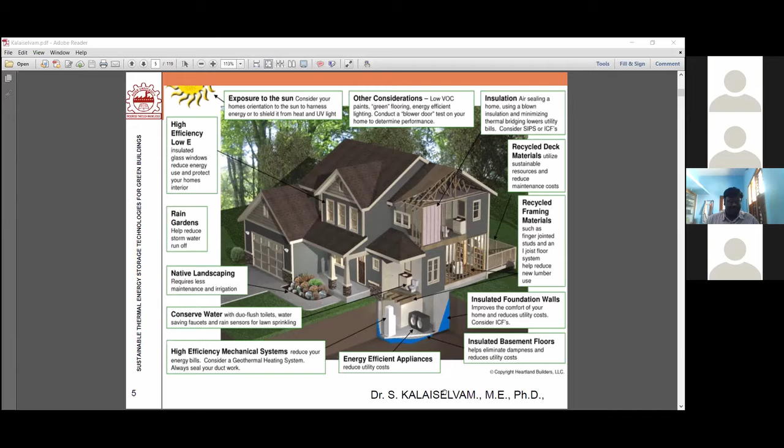So why is the building green? Let me discuss the impact of buildings on resources.

40% of the primary energy used is by the buildings. Out of the total electric consumption, 72% of the electricity was consumed by the buildings.

And these days, even the guest speaker narrated the importance of global warming and greenhouse gas emissions. Normally, we might have thought that industry is the culprit for CO2 emission. It's not really the case.

Our building, the building materials, or the materials used for the building and for the manufacturing of the material, it's all to be taken into account. Out of the total CO2 emission, our building itself contributes 39%.

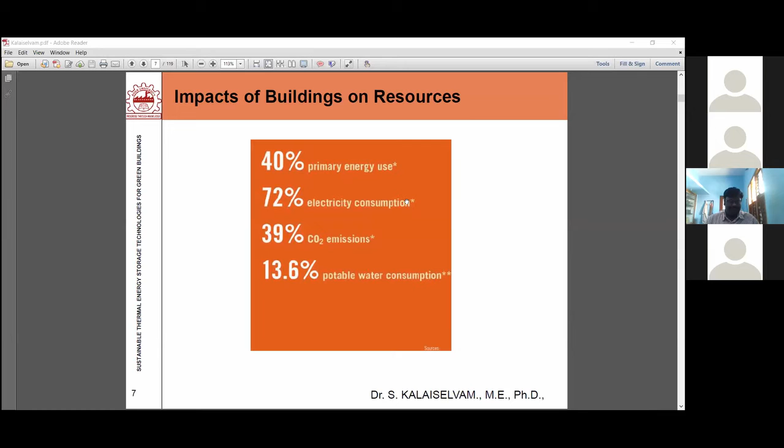And this is very obvious, the water consumption. You all know that 13.6% of total consumption was by the buildings. So this is a huge impact on energy by the building and building materials.

If you use the green building concept in the forthcoming construction of buildings, it has reduced energy usage by 24 to 50%, CO2 emission from 33 to 39%, water usage reduced by 40%, and solid waste reduced by 70%.

So this is the real benefit for the usage of green buildings.

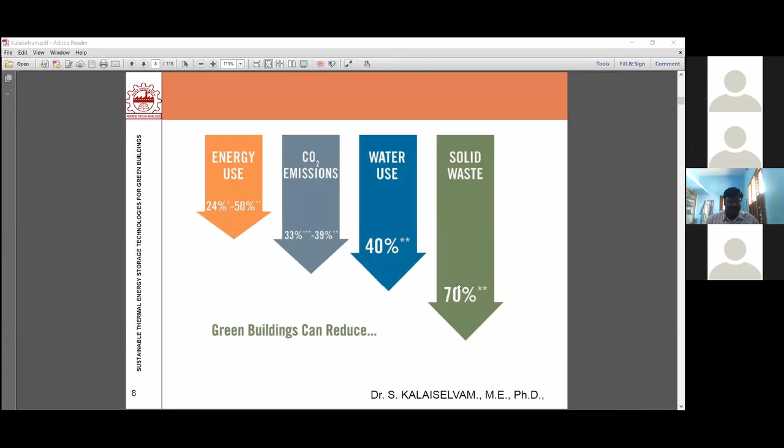As you all know, people spend 90% of their time indoors. And the indoor pollutant level may be 2 to 5 times greater than the outdoor. The outdoor CO2 concentration, or what we normally call the indoor pollutant, is CO2.

If you measure the outdoor CO2 concentration, it is around 352 ppm, and it varies from 350 to 450 ppm. But the permissible level indoors is 1000 to 1200 ppm. That is the permitted threshold limit value for any indoor environment.

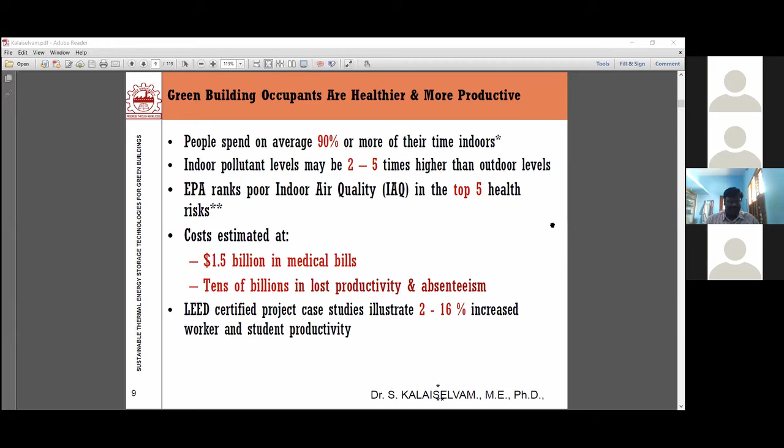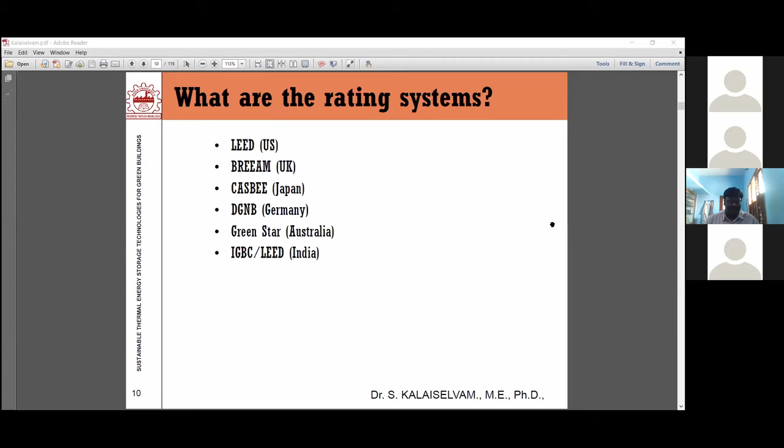As far as ratings are concerned, these are all the rating systems adopted worldwide: LEED, BREEAM, CASBEE by Japan, DGNB, Green Star. In India, we are following IGBC and LEED, which is very similar to the US rating.

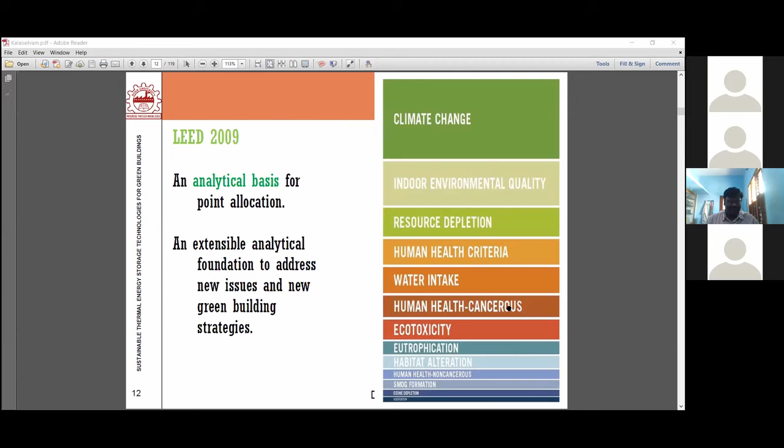As far as LEED 2009 is concerned, this is the weightage given: climate change has higher weightage, followed by indoor environmental quality, resource depletion, human health criteria, and water intake. This is the weightage given in LEED 2009.

This is the LEED certification scorecard. For indoor environmental quality, 17% is given. Sustainable sites, 21%. Water efficiency, 11%. Energy and atmosphere, 37%. Material resources comes to 14%. This is the scorecard breakdown for the LEED certification.

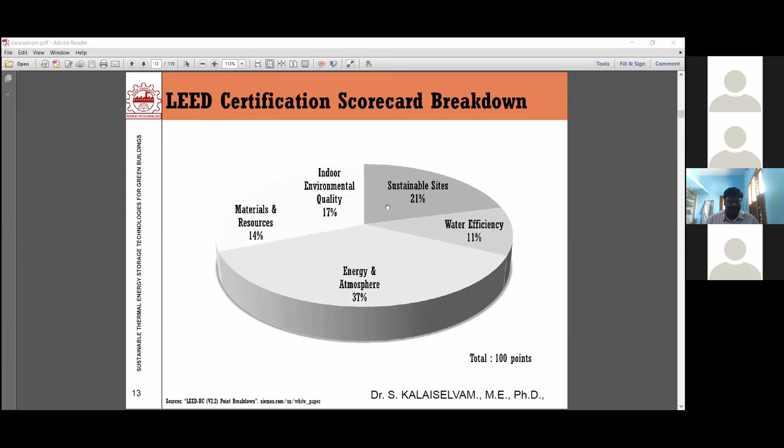To obtain a LEED certification as an engineer, we have to give importance to these particular areas.

As far as the certifications are concerned, yes, Pawan Kumar, any questions? Pawan Kumar?

Yes, please, you can post your question. Okay.

As far as the certifications are concerned, if you score 40 to 49, only a certification will be given. 50 to 59 points, silver rating will be given. For gold rating, you are supposed to score 60 to 79. For the platinum rating, they have to score 80 to 100 points.

As far as indoor environmental qualities are concerned, we have to use low emitting material. You have to emphasize the importance of ventilation, thermal comfort, daylighting, and the overall views.

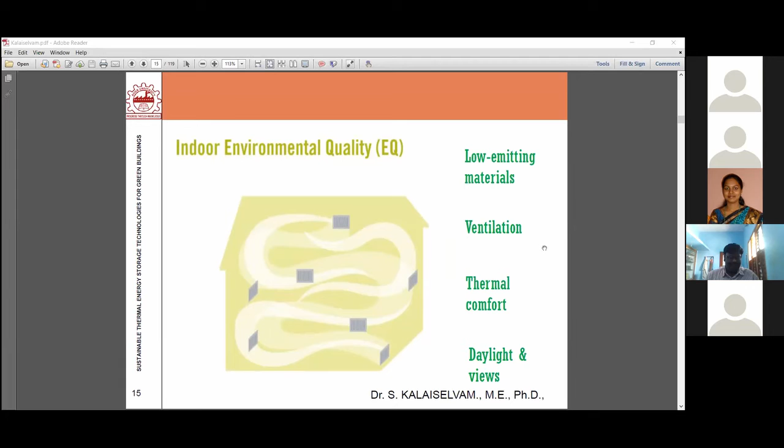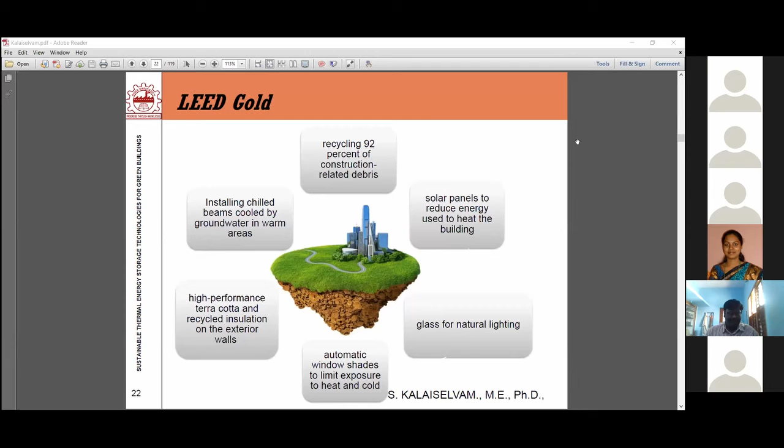And you have to use high performance insulating material for the exterior wall, and automated window shades to limit the exposure of heat or cold that infiltrates into the building. As I stated earlier, you have to use glass for natural lighting to reduce the usage of electrical lights during daytime, and solar panels to harvest energy to obtain the LEED gold.

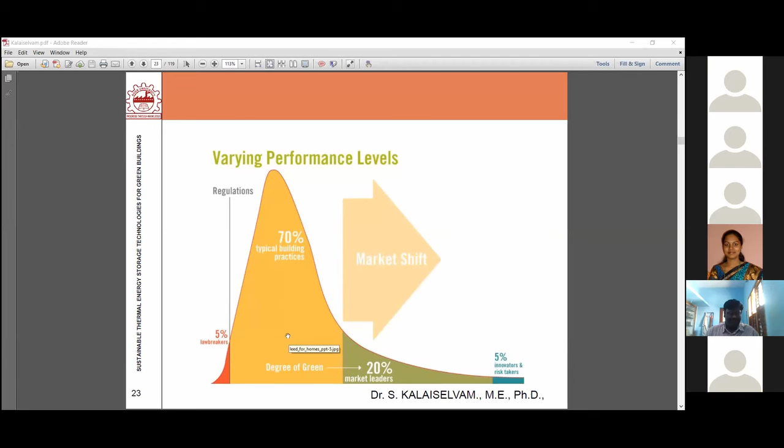This is the varying performance level. Most of the typical buildings coming under this are 70% of conventional buildings. Mostly you all know there are 5% lawbreakers; they will not come into this area. And the market is shifting towards green building. Already 20% of the people are the market leaders. So this 70% is trying to move towards the green building concepts.

So these are business perspectives for the benefit of green buildings. Whenever there are business perspectives or business benefits, then only the industry will move towards the green building concepts, or the residents themselves get ready for moving towards green buildings.

If you implement green building concepts into a building, the operating cost of that particular building reduces by 8 to 9%, and your building valuation increases by 7.5%.

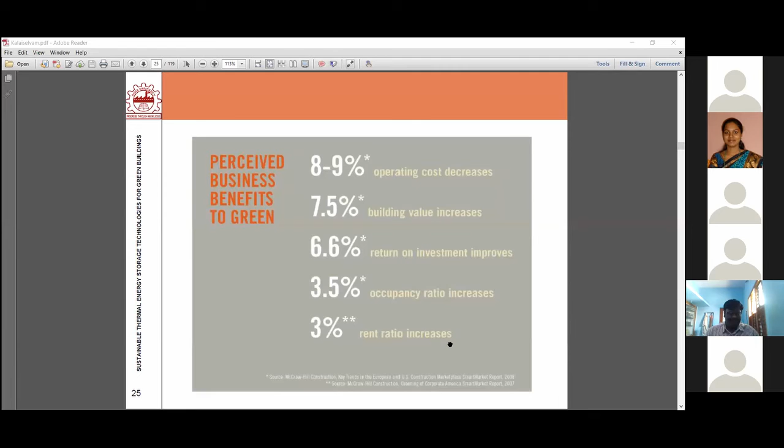And whenever there is an investment, we are looking for returns. As far as green building is concerned, the returns improve by 6.6%. The occupancy ratio increases by 3.5%, and the rent increases by 3%. So these are all the business perspectives for implementation of green buildings.

This is the benefit for builders, and this is the consumer benefit. Green buildings will have benefits for both builders as well as consumers. For builders, the cost is reduced, revenue increased, and high profits. For consumers, there's healthier indoor environment, more comfort, more durability, 30 to 60% more energy efficiency, and more environmental responsibility. So these are all the benefits for both builders and consumers.

So the market paradigm is moving towards the green building concepts.

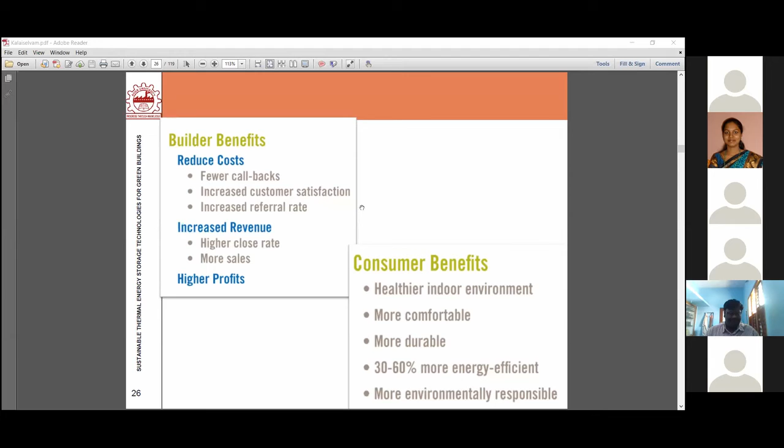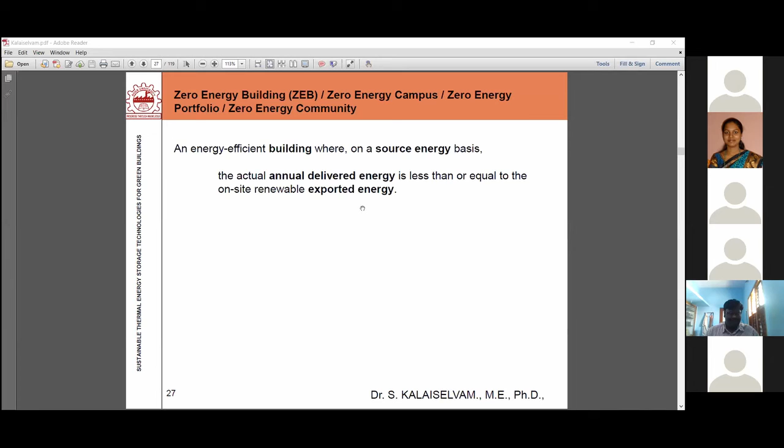So now we move on and narrow down to zero energy buildings, in the sense that you are not supposed to get even a single unit of energy from outside. You have to use whatever energy is available within yourself, and you are not supposed to let out even any waste out of the building.

So here, the delivered energy and exported energy must balance. You are not supposed to use any outside energy. If you use outside energy, an equal amount of energy has to be given back to the grid by using photovoltaics.

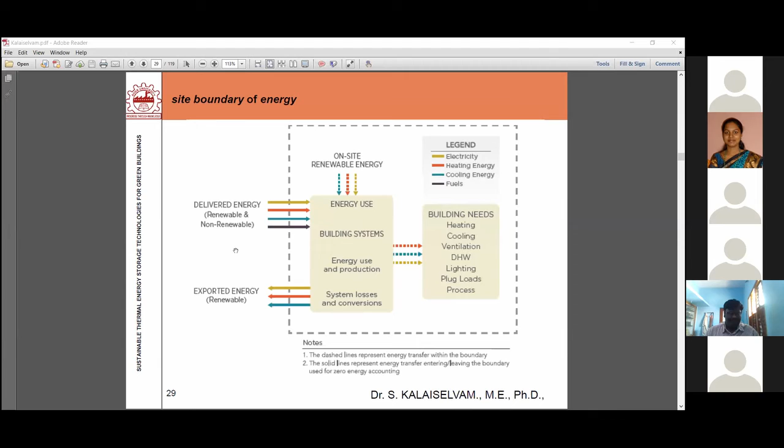To obtain this green building concept, we, as mechanical engineers, are using nanotechnology.

Even the Vice Chancellor of this university emphasizes the importance of nanotechnology, and the previous chief guest also spoke of the importance of nanotechnology.

Why is this so important? In the sense that it increases the surface area, the interface, and the size of it. Because of that, nanotechnology plays a vital role.

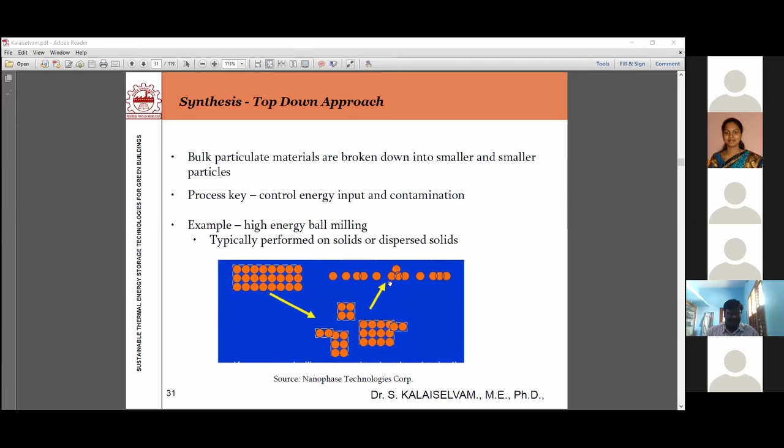And this is the bottom-up approach of synthesis of nanomaterial. A single atom has to be built, and depending upon the size and shape, it has to be constructed.

A typical example: if you place a coin one over another, that forms a cylinder. Similarly, the atoms have to be constructed in such a way that whatever shape and size you want, you can build it.

Mostly, we nano people use the bottom-up approach for the synthesis of nanomaterials.

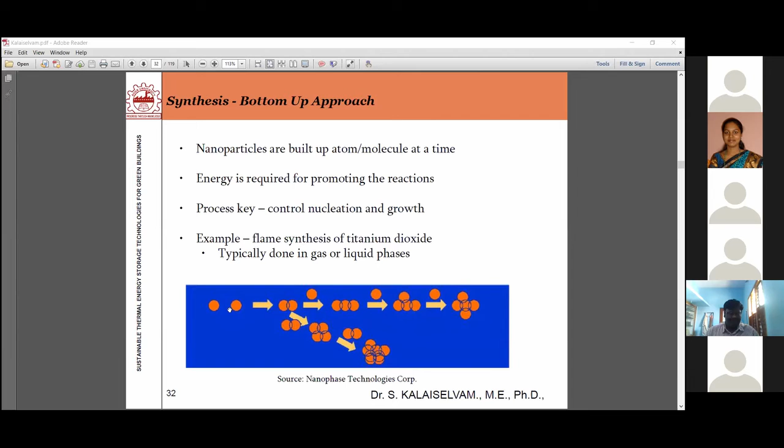These are some of the nanomaterials: nanoparticles, nanorods, nanosheets, and this is a 3D nanomaterial.

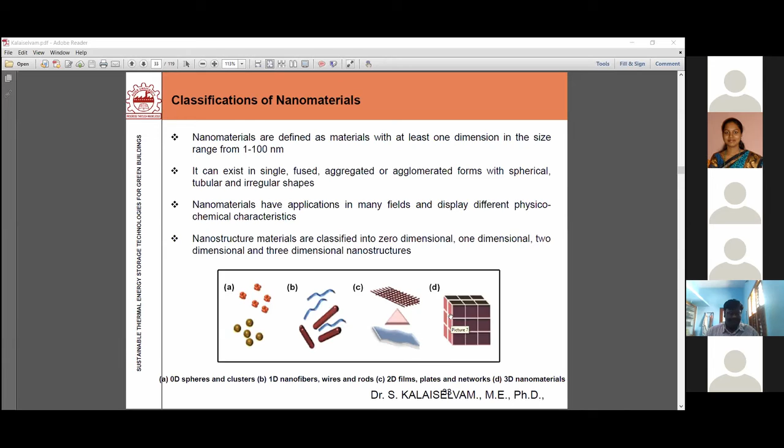This has already been discussed, so for any presentation I will put the slides if I go for a nano level presentation. Why is this so important? Take a typical example of carbon nanotubes.

Carbon is a bulk material. As a bulk material, it's a good insulator. When we make it as a nano form, that is carbon nanotubes, the conductivity of that particular carbon nanotube is better than copper.

Whenever I say transistor material, you immediately say silicon is a good transistor material. But this carbon nanotube is a better transistor material compared to silicon.

For heat conductivity, we immediately think of diamond, but carbon nanotubes conduct twice the heat compared to diamond. For field emission, they are 500 times more efficient than molybdenum, and carbon nanotubes are also stable up to 1500 degrees centigrade.

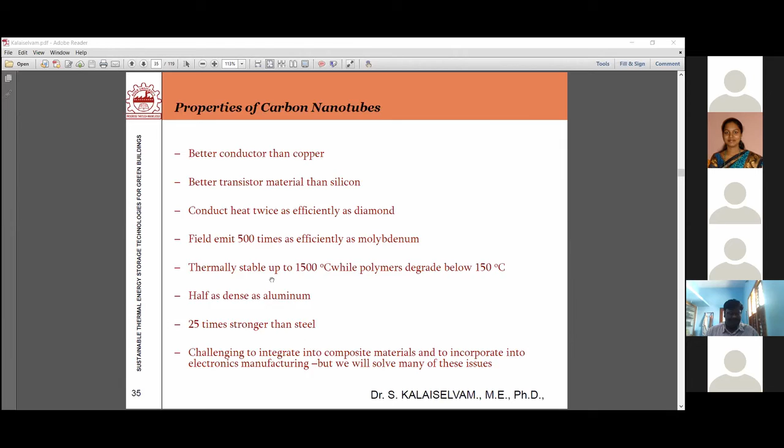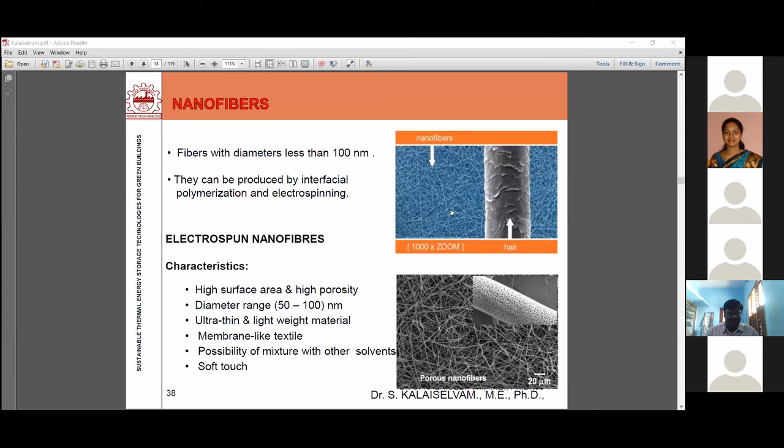And again, this is carbon nanofibers. The properties are similar to carbon nanotubes, but the synthesis of carbon nanofibers is a very simple process. These are some of the carbon nanofibers.

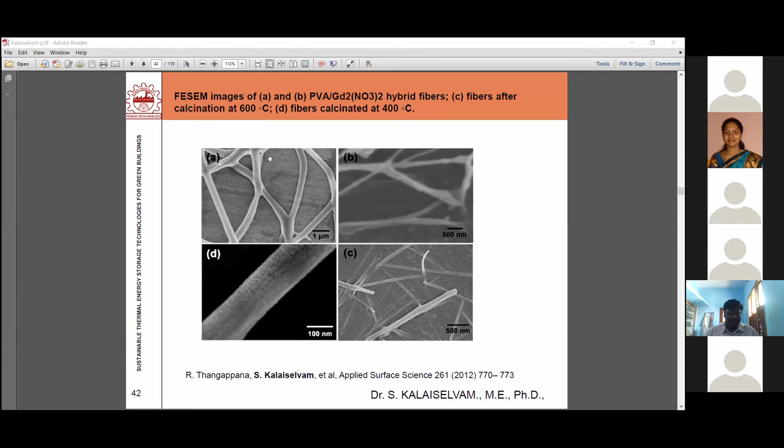And again, this is the nanofiber that was synthesized in our laboratory for the application of capacitor or supercapacitor applications.

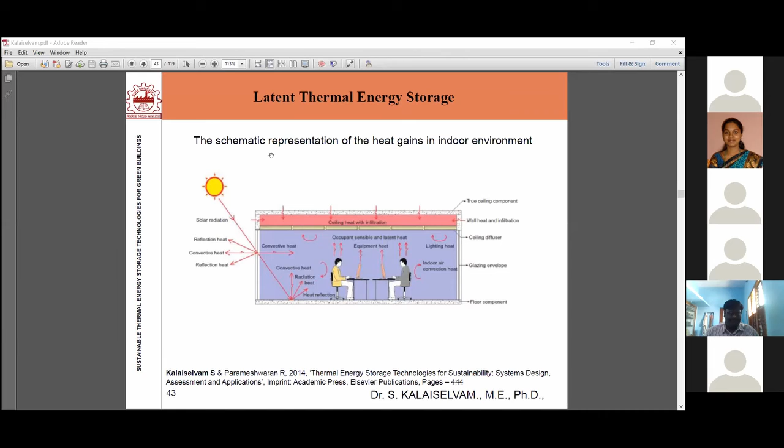Now I will move on to thermal energy storage systems. Normally, thermal energy storage systems are widely used to offset load conditions, storing energy as either sensible heat or latent heat.

As far as sensible heat is concerned, it may be difficult, as the energy storage density may be very low for sensible heat storage. The storage density for latent heat storage is high, and again it will provide a constant, particular temperature.

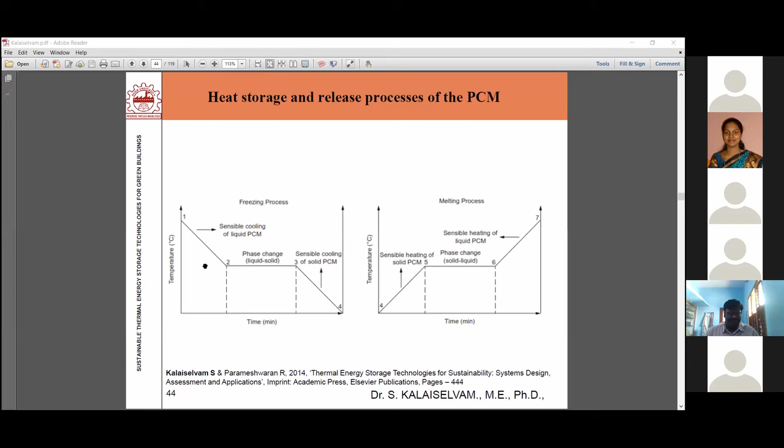Suppose you want to maintain 20 degrees centigrade; there are phase change materials available that can maintain a constant temperature. As far as the application, I will try to complete it in another 10 minutes.

PCM has cooling applications and heating applications. Cooling applications include energy savings in telecom sectors, reducing the air conditioning cost in building industries, and cold storage applications; heating applications include hot water, boiler industries, living rooms, swimming pools, etc. Other applications include pharmaceutical and biopharmaceutical industries, and food and poultry transport. It's also used as thermal wear for adverse climatic conditions.

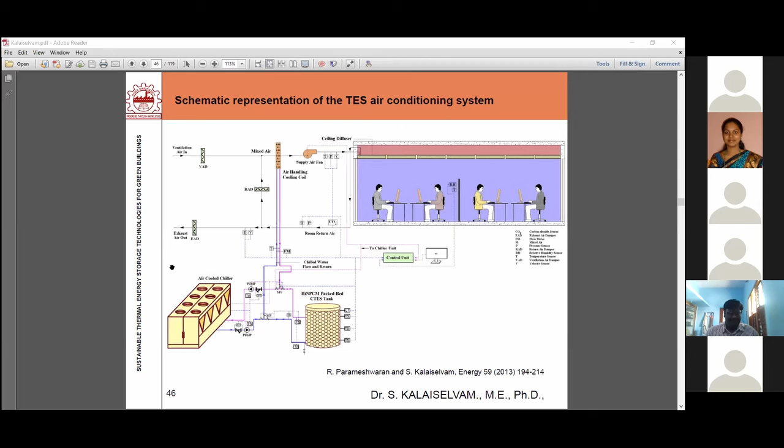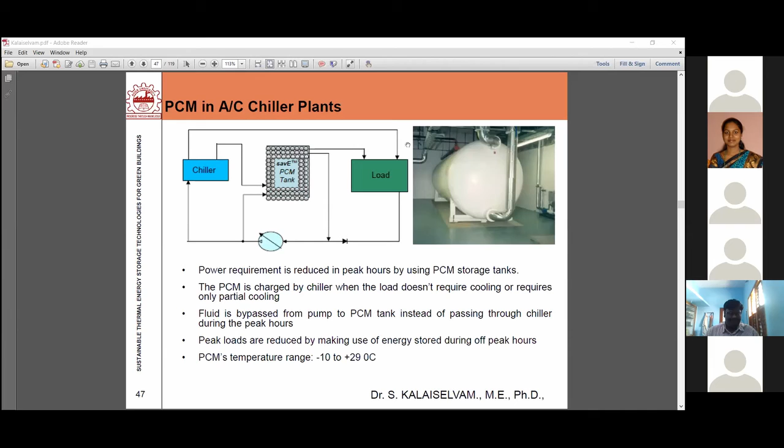And this is the actual space. This is the chiller plant, and this is our storage. And this is a close view of the thermal energy storage system. This is a tank where the heat energy or cooling energy can be stored, like how the current is stored in our battery. So this is storage to store the heat or the cool energy.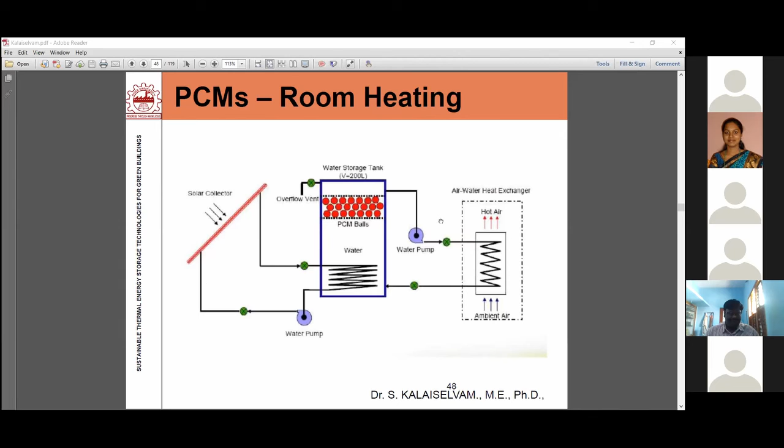And this is the PCM for heating applications. The solar collector collects the heat energy. It has to be transferred to this storage tank, and this is to be stored in this phase change material, and depending upon the requirements, it has to be delivered to the particular section where we require that heat.

And this is the PCMs for thermal jackets. For soldiers or people working in extreme climates, to make them comfortable, thermal jackets are available. So inside the jacket we have these phase change materials.

Because the temperature in the Himalayas may be very low, maybe minus 50 or minus 60 degrees centigrade, people may not be comfortable there. So they have to be provided a jacket. The normal jacket will not provide comfort. So we use the PCM based jackets, and we also patented a technology for these PCM jackets.

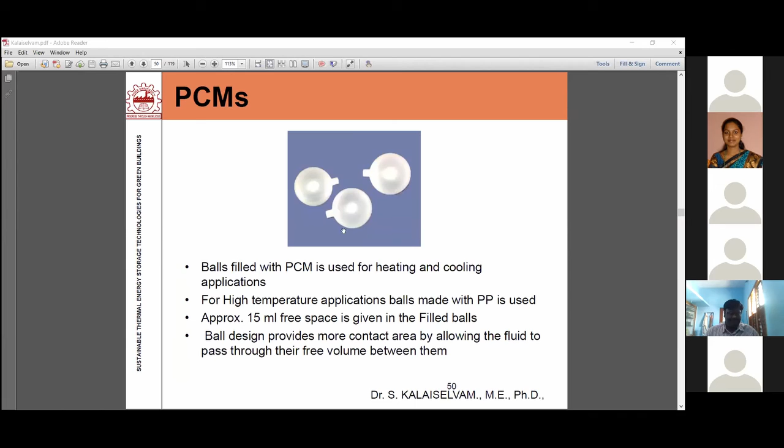And this is the PCM balls where the PCM materials are stored, and this is the way they are arranged in a storage tank. And this is nanomaterials. As far as our case is concerned, we prefer the battery to be charged at the earliest. Similarly, in the case of energy storage, we have to store the energy at very fast rates, and releasing must be in a controlled manner. In some applications, it may be the reverse.

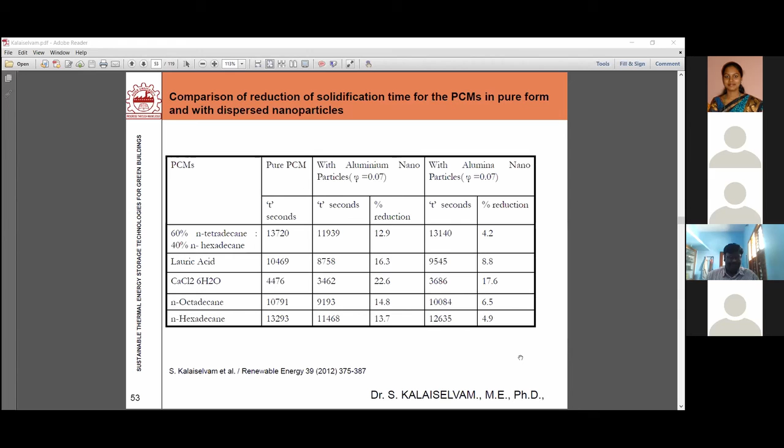So here we are using the pure PCM, that is 60% of n-tetradecane and 40% of n-hexadecane. It forms a pure PCM. By adding this aluminum nanomaterial, the solidification reduced by 12%. If we use the alumina nanomaterial, the solidification reduced by 4.2%. In case of lauric acid, the solidification reduced by 16.3%, and if you use the alumina nanomaterial, it is by 8%. So these are all PCMs, and this is the reduction in the solidification rate. By adding this nanomaterial, our PCMs solidified at a very fast rate.

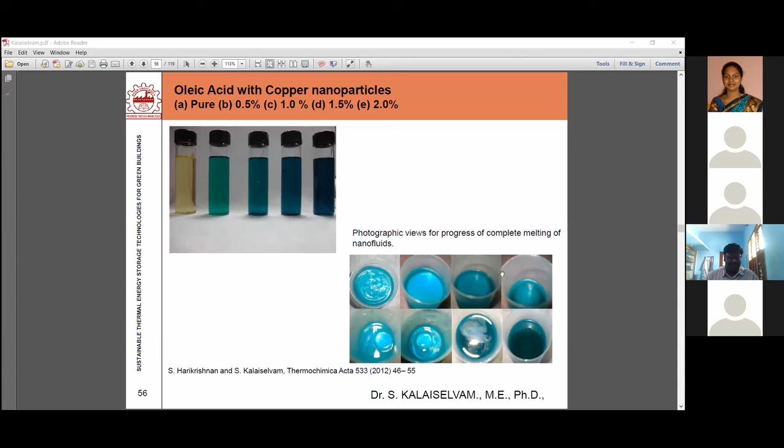Yes, this we can skip. And these are some of the PCMs with copper oxide nanomaterial. This is oleic acid nanomaterial in a pure form, by adding 0.5%, 1%, 1.5%. And this is a photographic view of the melting image. It was done by our researcher.

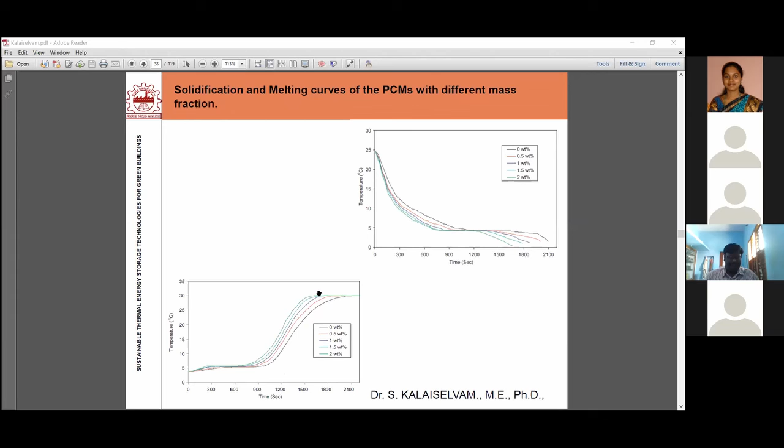This again is the image of the nanomaterial that was produced. And this again is a solidification and melting curve of the PCMs with nanomaterials. If you look at that particular solidification and melting curve, the solidification and discharge time reduces. And by adding this nanomaterial, there is a slight change in the latent heat that is also acceptable by the research community.

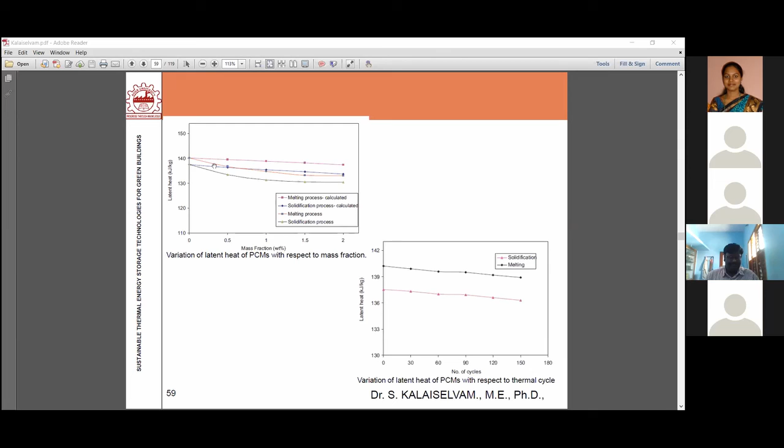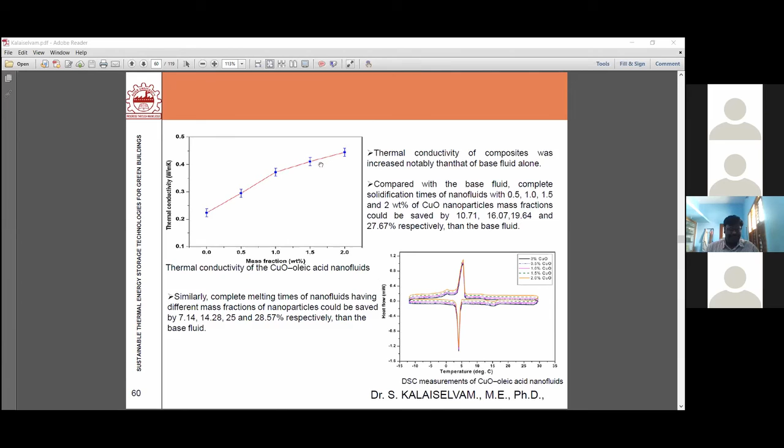So you may wonder why the solidification reduces. For that, there is evidence stating that by adding this nanomaterial, the thermal conductivity of that particular fluid increases. This is without nanomaterial; by adding this nanomaterial, your thermal conductivity increases. And this is oleic acid with copper oxide nanomaterials.

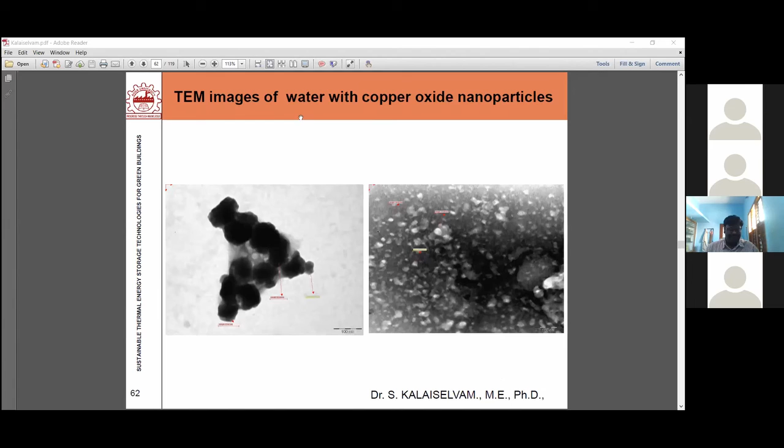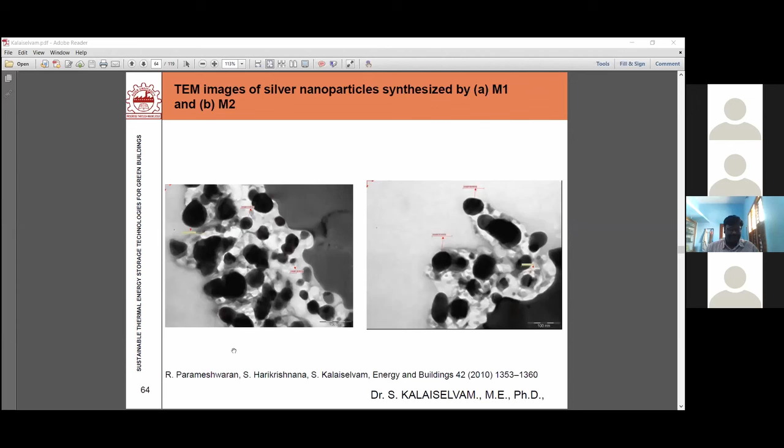And this is the TEM image of copper oxide nanomaterial. And this is the photographic view of the silver nanomaterial that was synthesized in our laboratory by the researcher of our laboratory, Dr. Parameshwaran. He is also a speaker for this conference. And this is the TEM image, again synthesized by Dr. Parameshwaran. This is the same image of the silver nanomaterial that was produced in our laboratory.

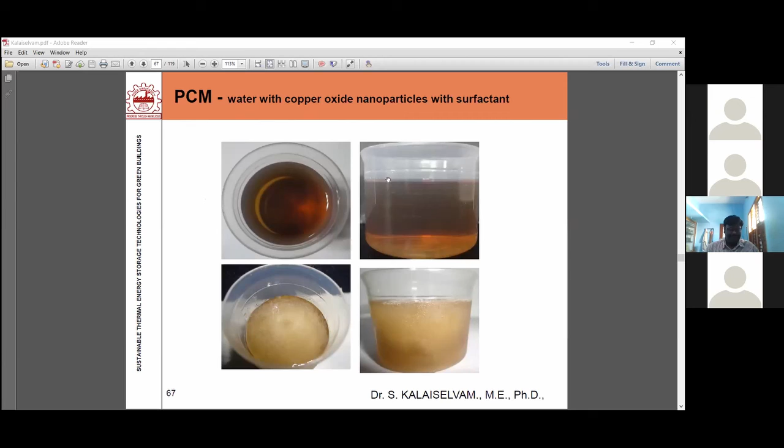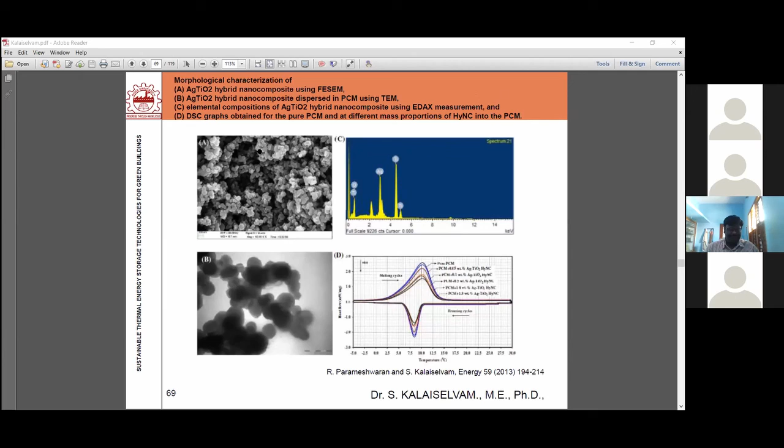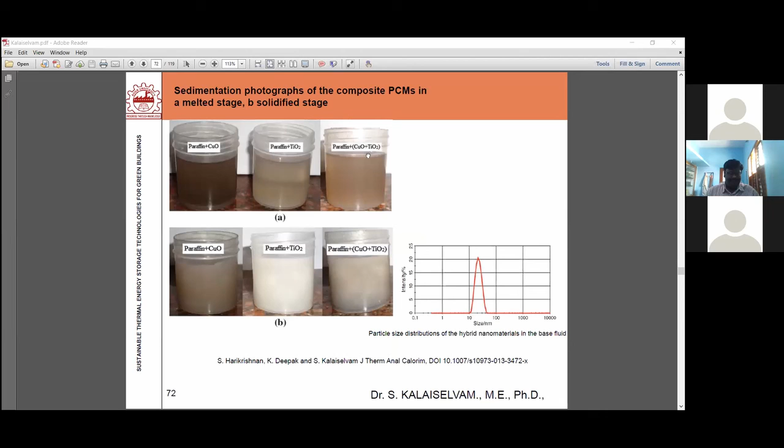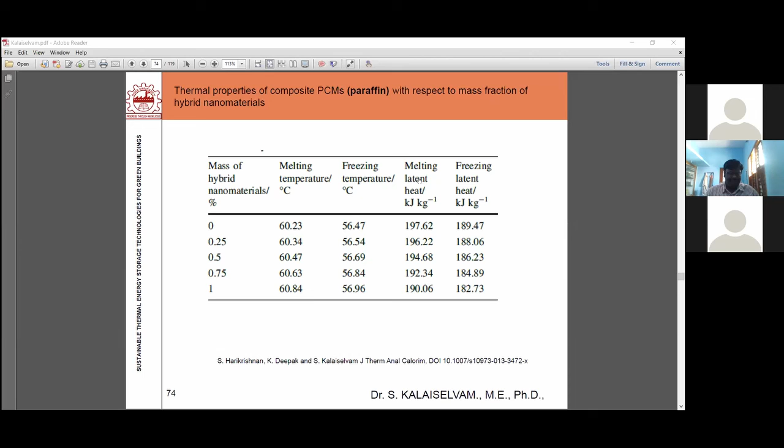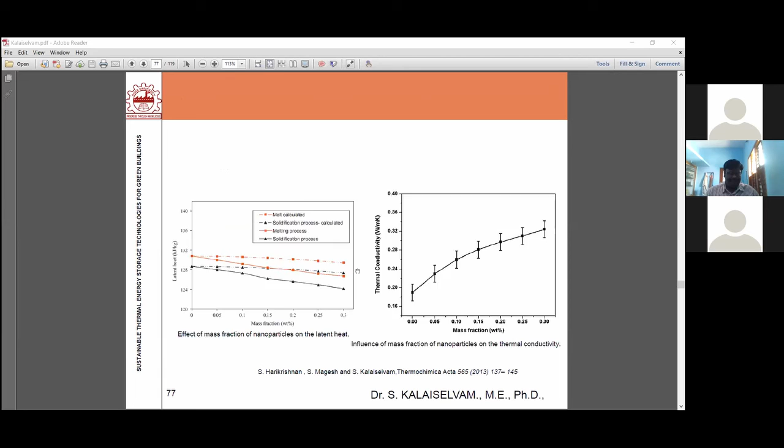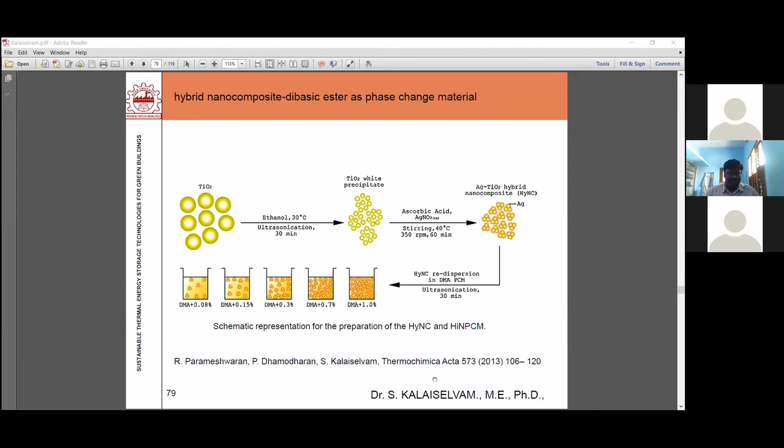Because of the time scarcity, I can give an overview of that. If you want to have a detailed understanding of this particular thing, you can refer to this particular reference. That is why for all the slides, the reference is given below. Whatever I'm presenting here is all published in reputed international journals. This again is the Ag TiO2 hybrid nanomaterial. Yes, I can skip this.

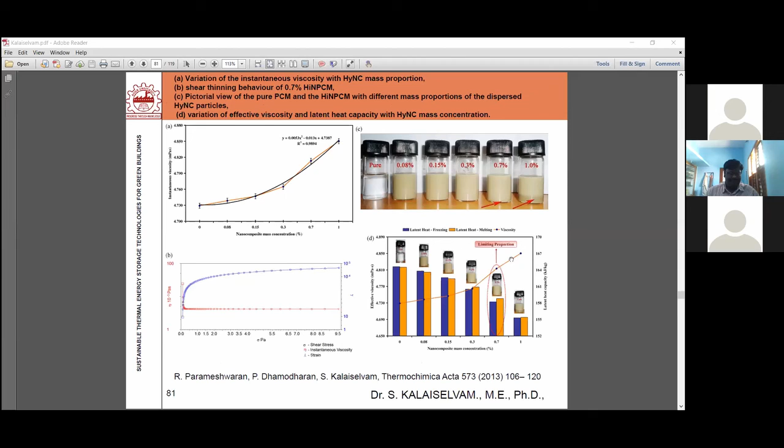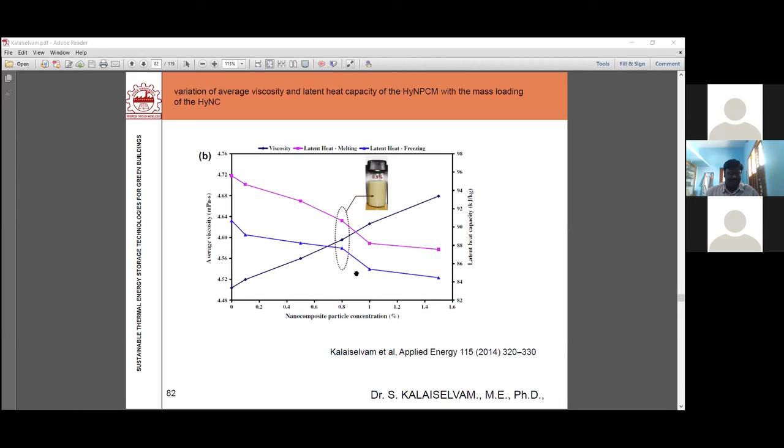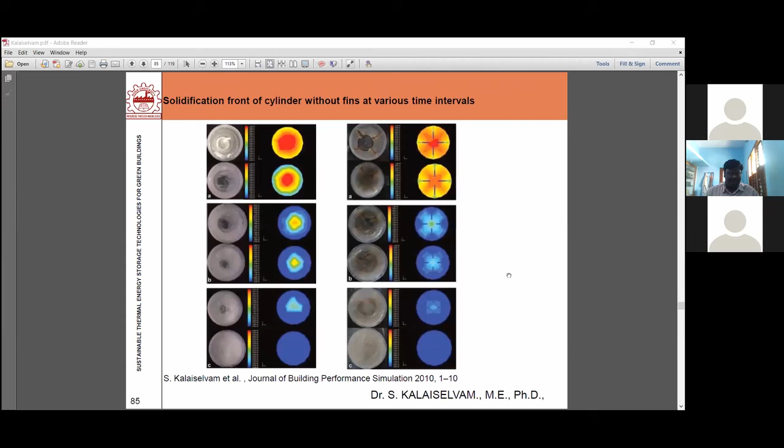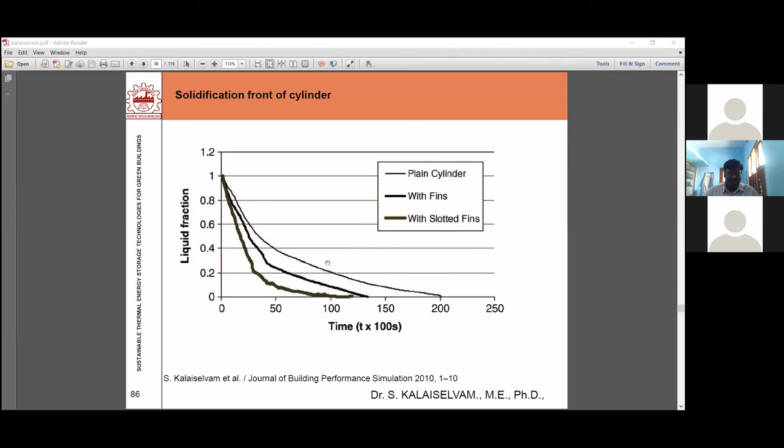So you may ask whether, instead of going for a nanomaterial, we can also put fins into the ball. So we also tried that, and the results were obtained. And we concluded that instead of putting the fins, if you put a nanomaterial, the effect will be much more perfect, or much more enhanced results may be obtained.

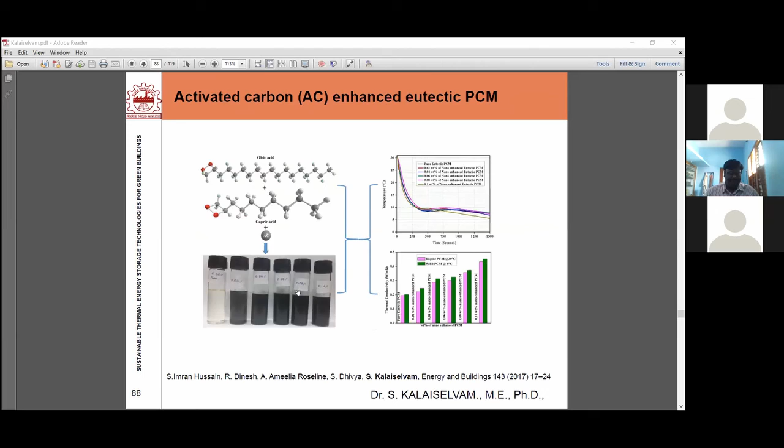And this is the carbon fibers or activated carbon. This is the image of the activated carbon that was produced in our laboratory for energy storage applications. And this is activated carbon with eutectic PCM, how it is formed. And this is the application for that PCM, that is for banana ripening storage. That particular PCM can be used.

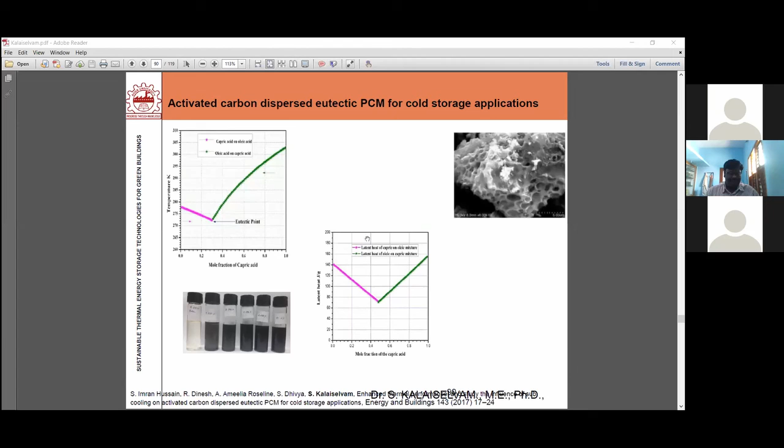This is the eutectic curve. This is the temperature, the freezing and melting curve. This is the thermal conductivity. And here the comparison is given for pure eutectic PCM, its solid state conductivity and its liquid state conductivity.

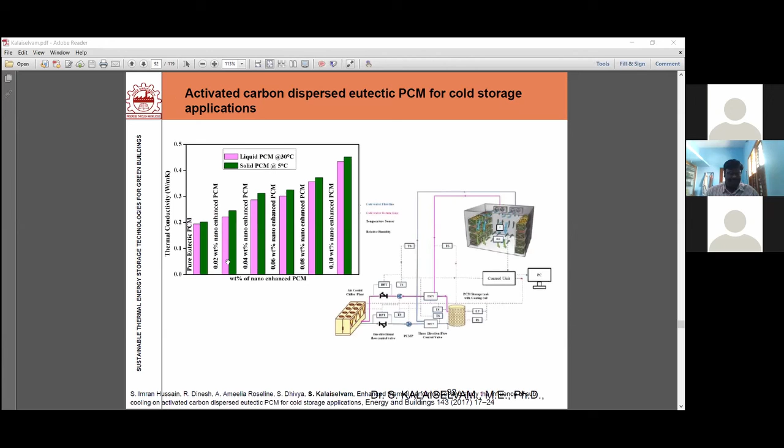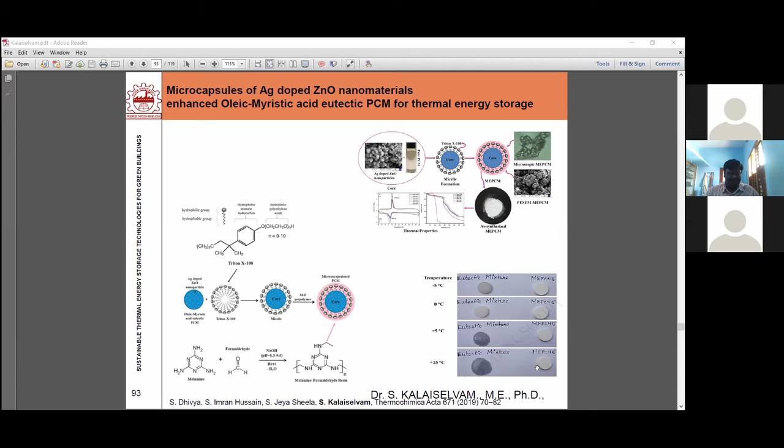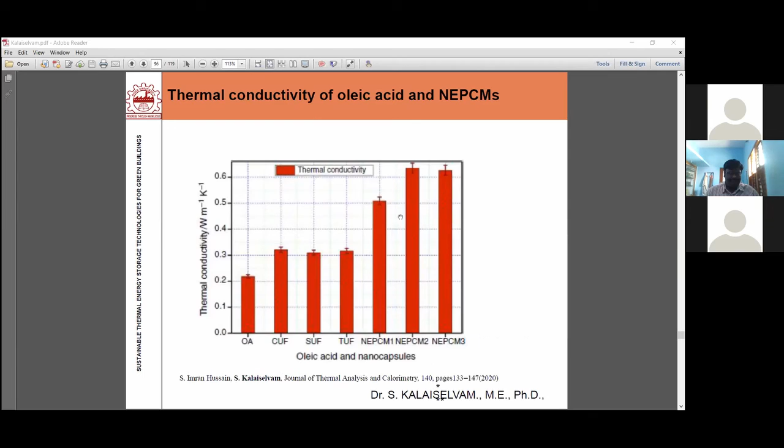It's in solid state. This eutectic mixture at 0 degrees centigrade is solid. At plus 5 degrees centigrade, it starts melting, but the micro-encapsulated PCM is still in the same state. At plus 25, the mixture becomes fully liquid. The state of the encapsulated PCM is not changed, but latent heat storage takes place. And this is again micro-encapsulated PCMs. This is some image: the thermal conductivity of oleic acid and the nano-encapsulated PCMs. Yes, we can skip that.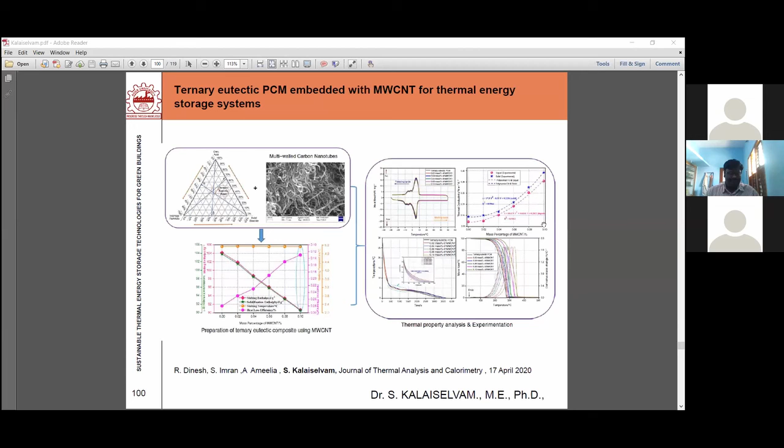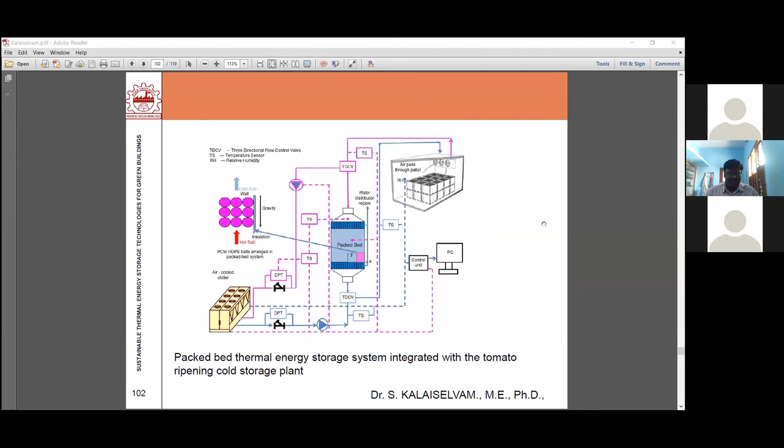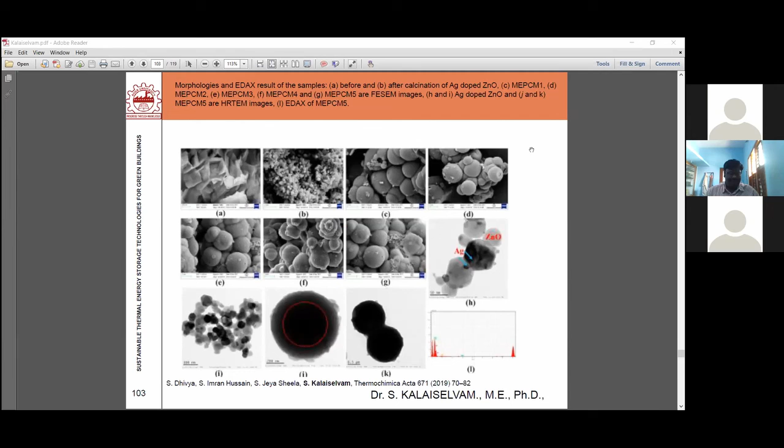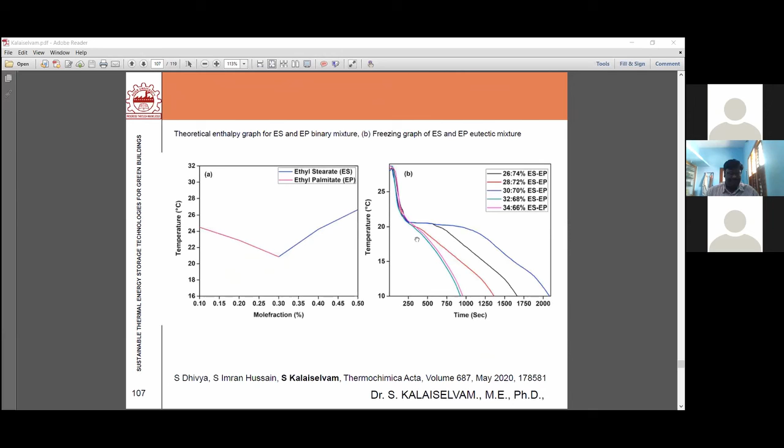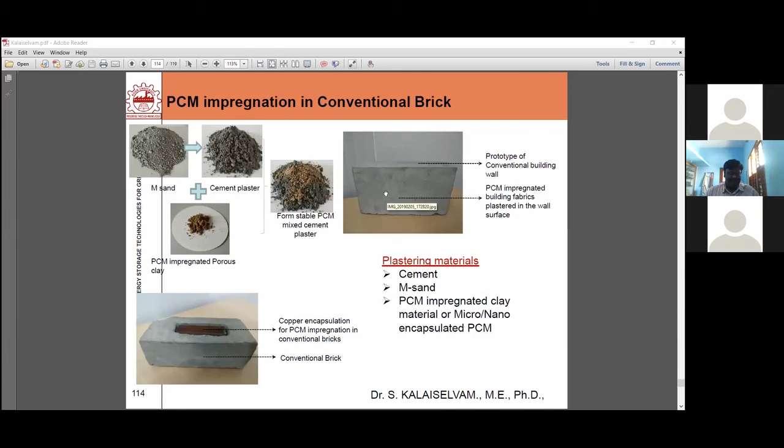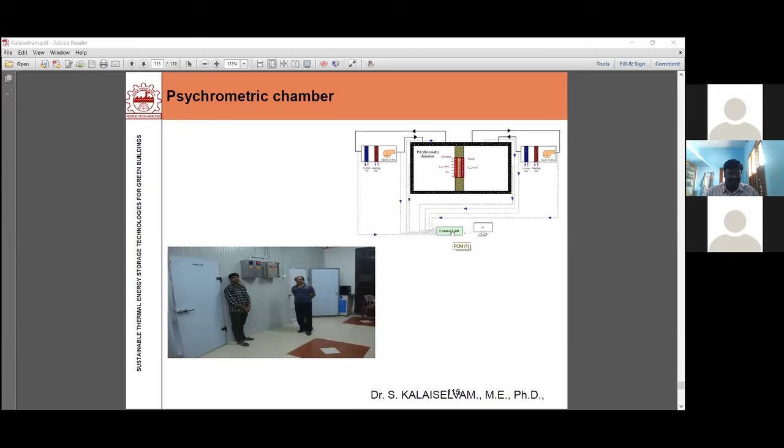So we also used the same material for building applications. This is the conventional brick material with normal PCMs. So we synthesized the micro-encapsulated PCM and plastered it over the surface. We conducted a lot of studies on that. And for that, we used this psychrometric chamber to study the brick material. Here, the outdoor environment can be maintained, and the indoor condition can be maintained. How the brick performed was studied here. And this is the capacity of the psychrometric chamber.

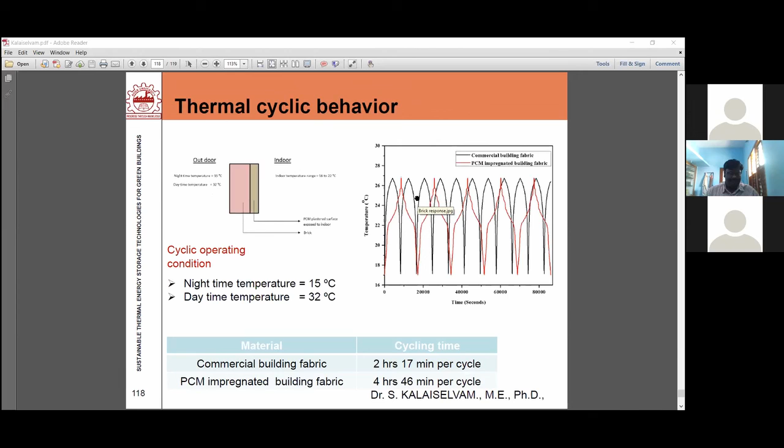Maybe in another 2 minutes, I will complete it. And this is the way we test the performance of the PCM bricks. So normally, in the case of PCM bricks, the cycling time increases if you go for PCM impregnated building bricks.